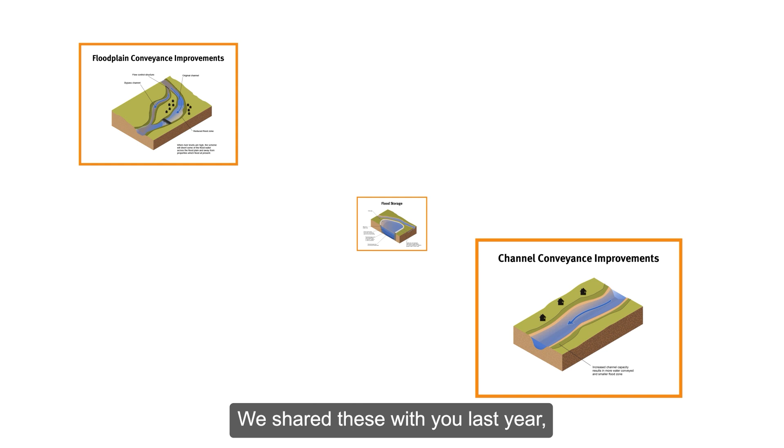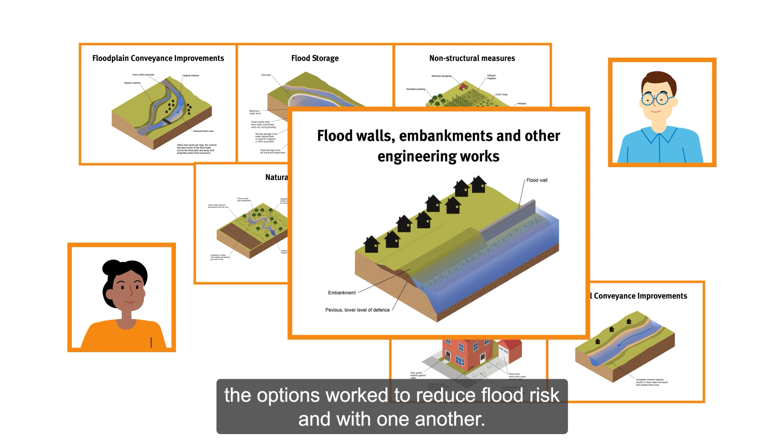What ways to reduce flood risk have you been looking into? We have been considering a wide range of ways to reduce flood risk. We shared these with you last year. Some of them were suggested by your friends and neighbours. Flood modelling and other tools helped us understand how well the options worked to reduce flood risk and with one another. Government guidelines also informed our methodology.

That seems like a lot of work. Can you tell me more about what you found out? I'm glad you asked. Here is my colleague to explain a bit more.

Our research looked at reducing flood risk for a number of different scenarios, such as smaller, more frequent, and larger, less frequent floods. We found some ways are just not effective enough. Let me explain why we aren't taking some of these forward as main ways of reducing flood risk.

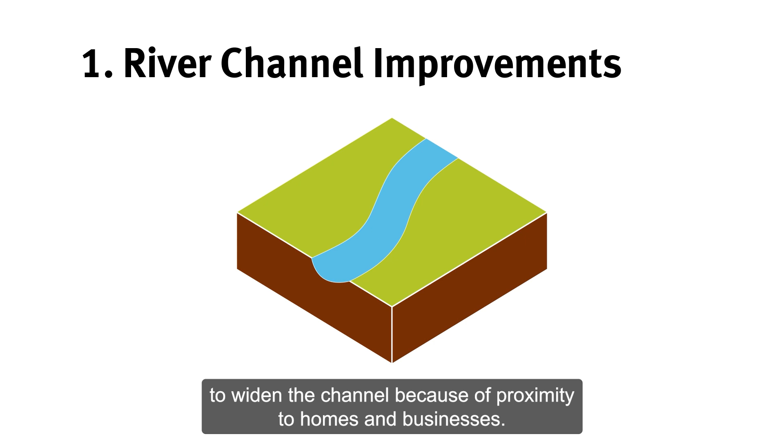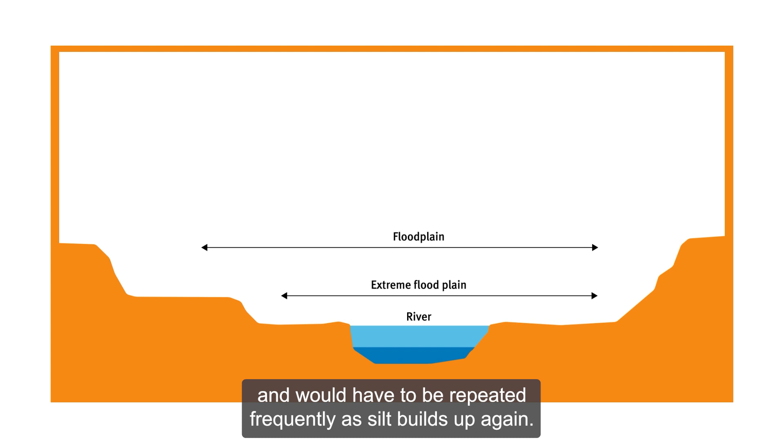We explored river channel improvements. Unfortunately, there isn't enough space to widen the channel because of proximity to homes and businesses. Reshaping and dredging would need to be done over a long stretch of the river to great depths and would have to be repeated frequently as silt builds up again. This would also be very disruptive, costly and harmful to local wildlife.

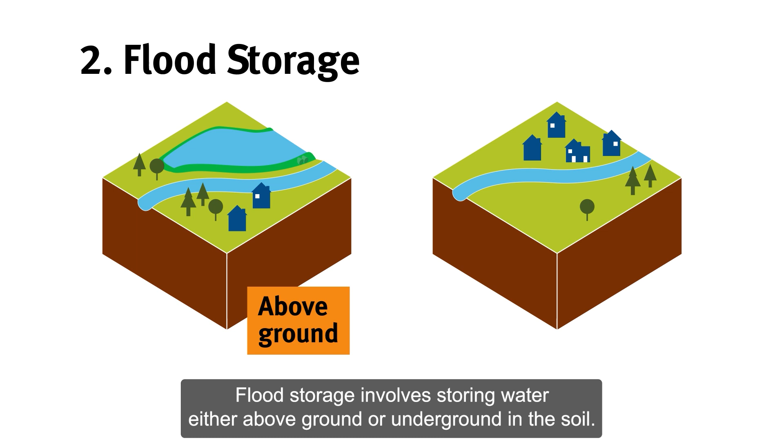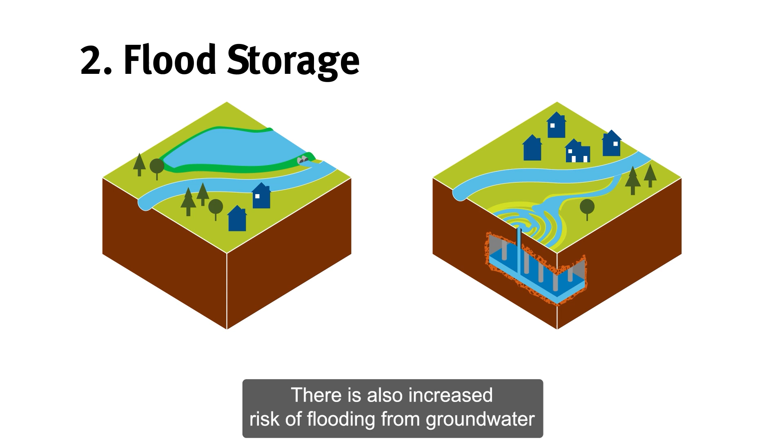Flood storage involves storing water either above ground or underground in the soil. There is simply not enough space in the study area to store the necessary volume to make this effective. There is also increased risk of flooding from groundwater and reduced water quality.

Natural flood management is where natural techniques are used to store or slow the flow of water. We have looked into whether there is any way that targeted natural flood management could be done as part of our project, but on its own it would not be enough to reduce flood risk to the extent that is needed in this area. The two emerging options that could reduce flood risk are Option Purple, flood embankments and walls,

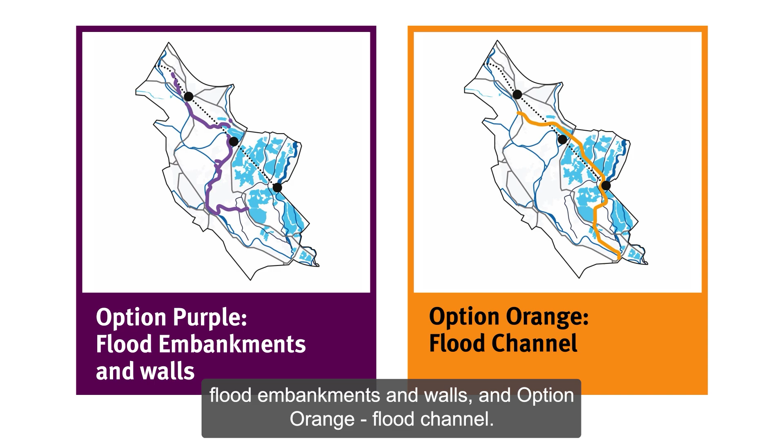and Option Orange, flood channel. Further investigation into these options doesn't guarantee they will happen. More research will need to be carried out to ensure they are possible to deliver. We already know from the previous work looking at a channel that it is expensive and would be difficult to fund. Can you tell me a bit more about Option Purple?

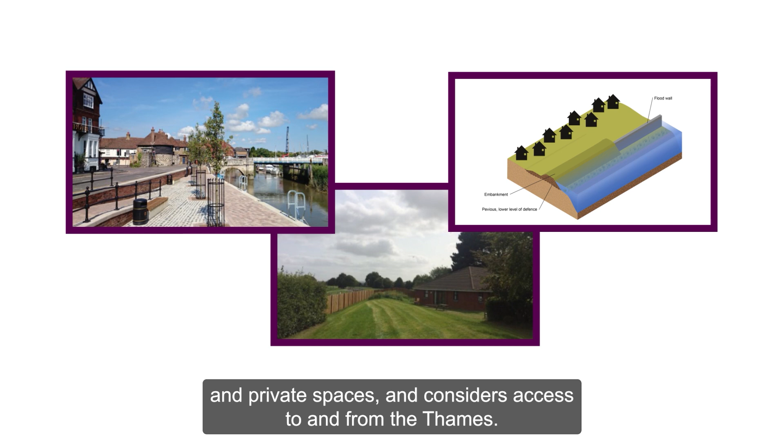We will be looking at raising and repairing existing walls and embankments and creating new ones. How will you ensure it fits in with the surroundings? We will make sure any option taken forward is sensitive to public and private spaces and considers access to and from the Thames. It is also essential that we do not increase flood risk elsewhere because of our work.

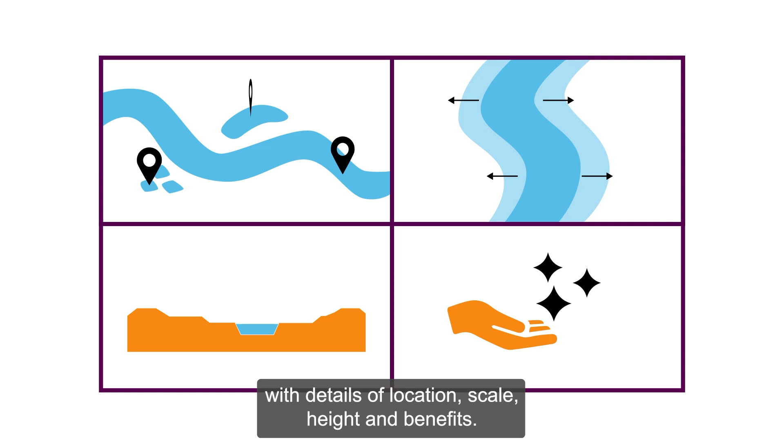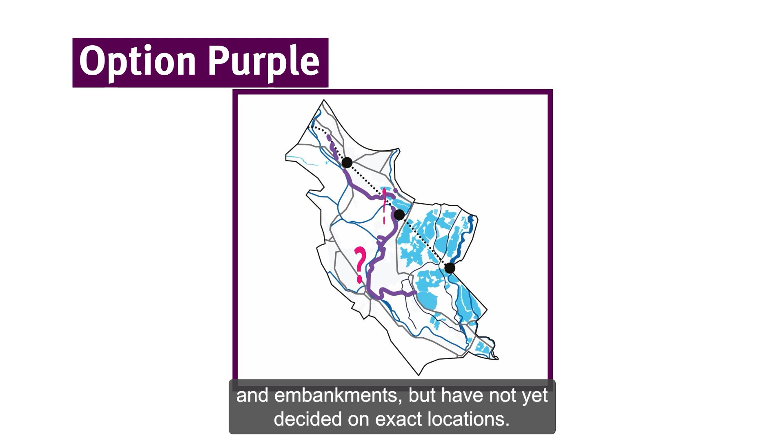Possible locations for Option Purple could be in and around Datchet, Wraysbury and Ham Island. Next time we meet, we aim to be able to provide you with details of location, scale, height and benefits. We have begun to look at where it would be possible to put flood walls and embankments, but have not yet decided on exact locations. They would likely need to be in the approximate areas that are shown on the map.

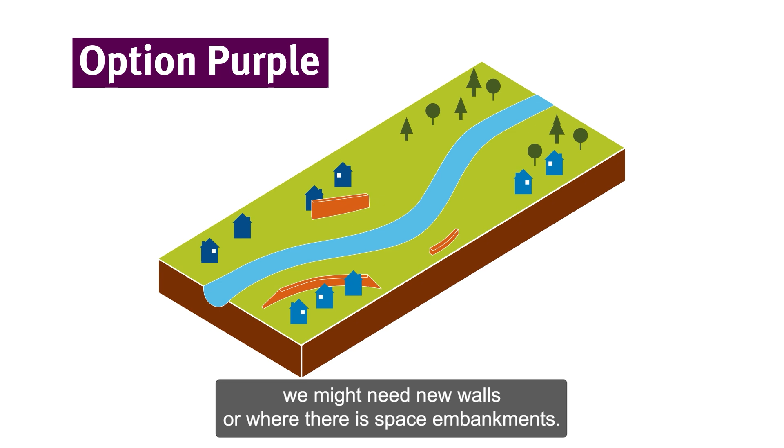In some places, existing walls could be adapted, and in other places, we might need new walls or, where there is space, embankments. These designs will evolve based on feedback and new information that arises. How is Option Orange different?

Option Orange, a flood relief channel, is built alongside a river to divert flow away from areas at risk of flooding. It looks very much like a normal river. During a flood, some flow is contained in the River Thames, but some water moves through the floodplain. With a flood relief channel in place, some of the overland flow would be diverted and rejoin the main river further downstream, avoiding flooding properties and businesses on the way.

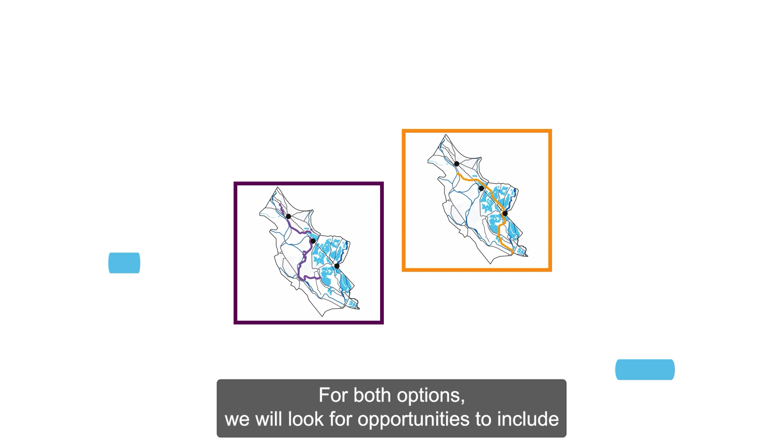So this is similar to the work done previously? You are right. We will look at what has already been done and see if this could work in the future. For both options, we will look for opportunities to include other benefits beyond reducing flood risk, such as improving wildlife habitat.

Doing this will also allow us to comply with relevant legislation and attract other funding opportunities. More importantly, it will involve the community to ensure we make the most of any work we are doing to make local improvements. It looks like you will not be able to reduce flood risk everywhere. What else will you be doing? You are correct. The scale of flooding is so large that we cannot completely remove the risk.

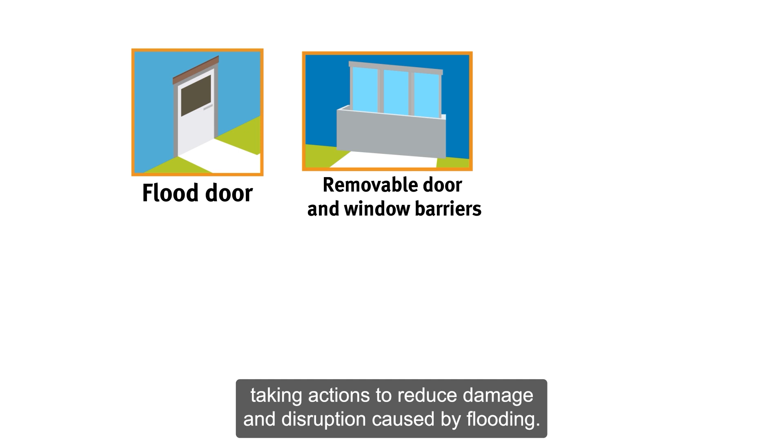With climate change, the frequency and severity of flooding will increase. We will look to build up resilience within the community now. Increasing resilience means taking actions to reduce damage and disruption caused by flooding. For example, you might have heard about property flood resilience. It involves making physical changes to properties to reduce water getting in.

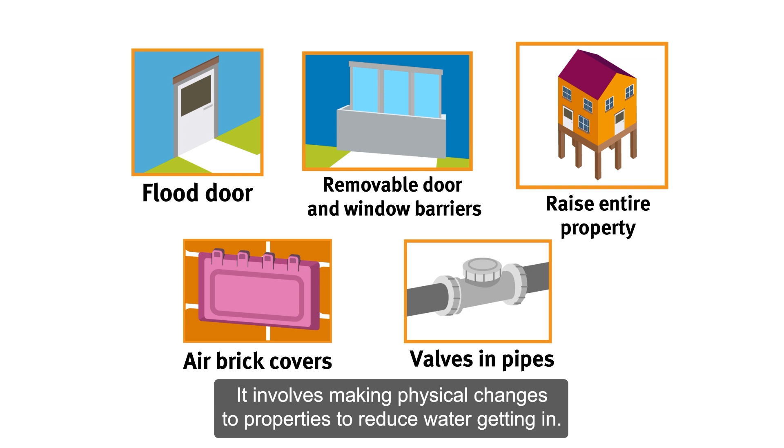What other ways to increase resilience are being considered? There are ways we could help make it easier for the community and local responders to prepare for, respond to, and recover from flooding. Improving existing flood warnings and alerts, reviewing current emergency planning arrangements, and developing more community flood plans would be beneficial. There may be opportunities to raise public awareness and educate members of the community too.

We want to support flood wardens with further resources or information that they need to help them respond to flooding and continue their invaluable work. I appreciate the effort you have put into this process so far, but how would this be paid for?

Funding. We want options to reduce flood risk to attract the maximum of public funds we are eligible for. That means justifying how the project compares with the benefits achievable in other parts of the country. We are continuing to work with the Council, our funding partner, to seek additional sources like grants and partnerships.